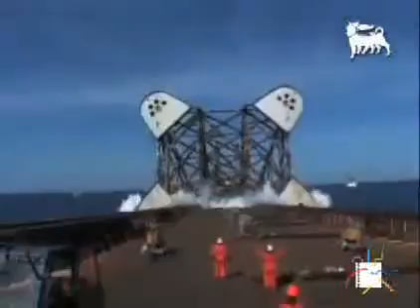A challenge that led to the construction of one of the largest Mediterranean offshore platforms and the establishment of a new world record for offshore lifting, 12,100 tons. For the design of the platform, Saipem put together a task force of about 200 engineers that worked for over a year.

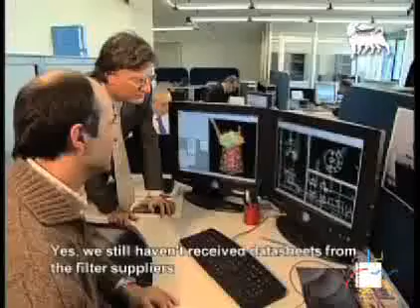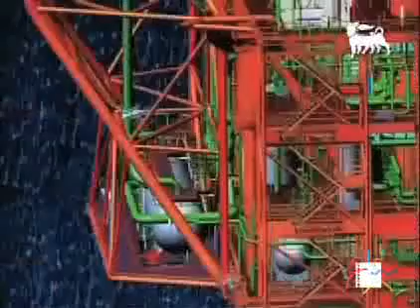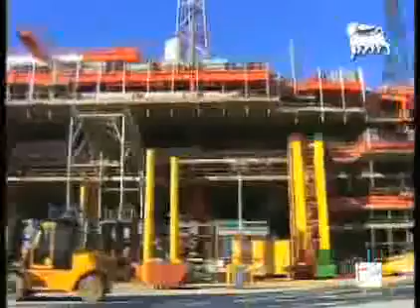The basic design of the Sabratha platform was supplied directly by the customer. Saipem verified the suitability of this basic design and endorsed it. Following that, it developed the detailed design and procured the project materials with the support of the consortium partner Hyundai Heavy Industry, HHI. The construction of the large integrated production deck took place at Ulsan in Korea.

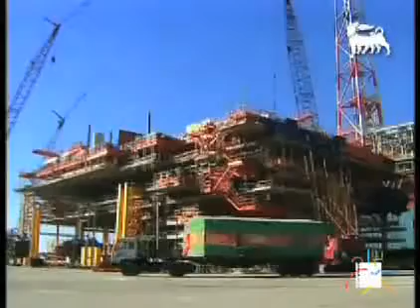The Intermare Sarda yard, fully owned by Saipem on the east coast of Sardinia, has been chosen to build the jacket. This jacket, with its weight of approximately 24,000 tons and length of 207 meters, can be ranked among the biggest offshore substructures ever constructed and installed in the world.

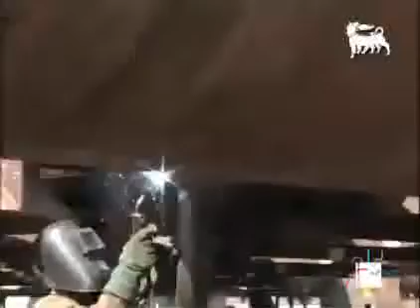In order to accommodate such an exceptional structure, the yard has to be reorganized in terms of both space and project and working manpower. An additional construction challenge was created by the extraordinary thickness of the tubulars, which reached 120 millimeters, and the fact that almost 90% of the nodes had to be thermally treated. By the end of the project, more than 1 million man-hours have been spent in Arbatax alone, whilst an additional 600,000 man-hours were necessary for all the prefabrication work subcontracted outside Arbatax.

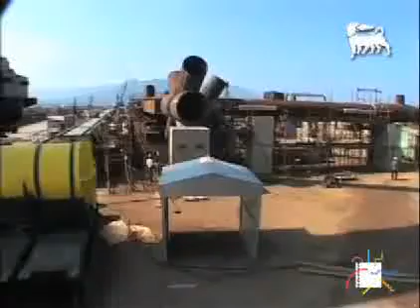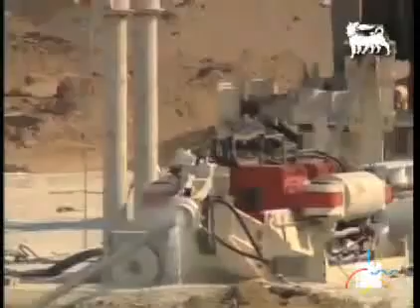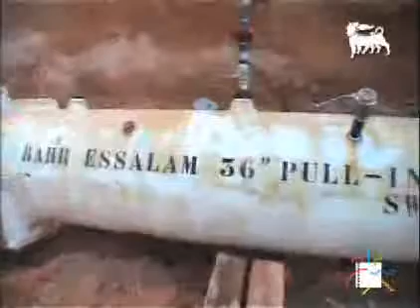Within the ambit of the Bahr Essalam project, two pipelines, 36 and 10 inches, of over 110 kilometers, were laid from the offshore platform to the Mellitah coast in Libya for the transport of gas and condensate. The barge Crawler did the shore approach works. In-field sea lines were also installed to transport the production fluid from two subsea production manifolds to the platform. All these pipes were laid by the Castoro Sei vessel.

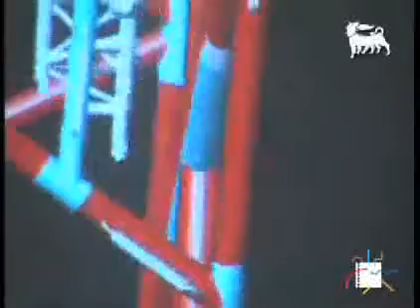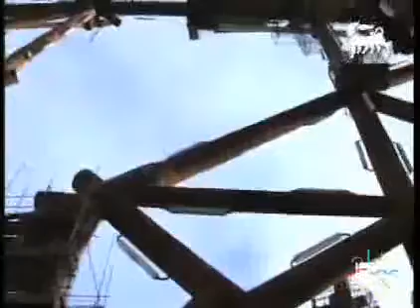Right from the beginning, the jacket fabrication plan was organized in order to split the entire structure into several sub-elements, such as nodes, pile clusters, mud mats, and the buoyancy tanks. All these elements have been prefabricated in various selected and qualified subcontractors' yards and workshops throughout Europe. Saipem and Intermare Sarda made a tremendous organizational and logistical effort in order to ensure that all the sub-elements were delivered on time and with the quality required by the very stringent project specifications.

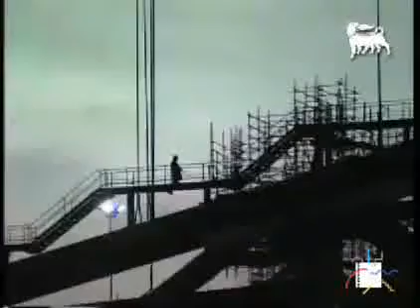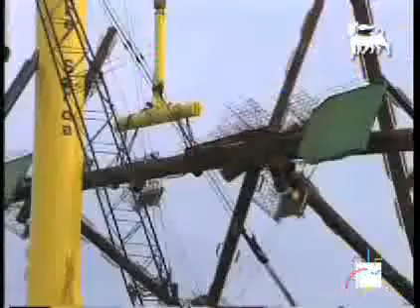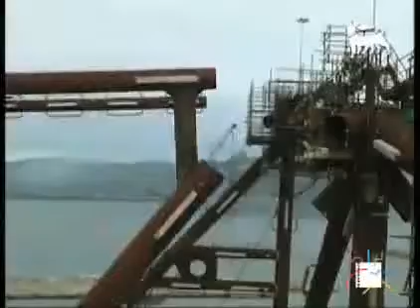All the elements making up the structure were then assembled into 15 major assemblies called work packs, ranging from 1,000 to 2,600 tons. This concept of splitting the whole structure into work packs was made possible by the availability of the 1,000-ton tower crane in Arbatax and of a fleet of self-propelled trailers with capacities ranging from 100 to 600 tons. Furthermore, this method allowed a very high degree of flexibility in the planning of such a massive job and, when necessary, also allowed some margin of delay through very accurate planning control.

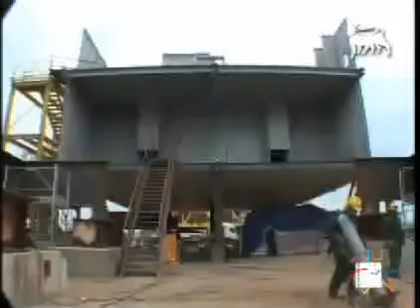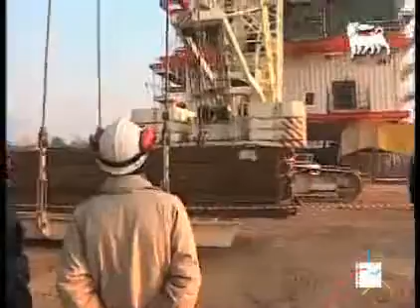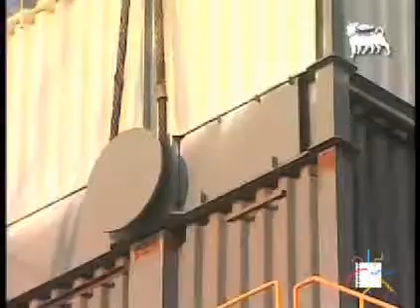At the same time, another company, the Rossetti Marino subcontractor, started constructing the 1,700-ton, 117-bed accommodation module in its yard in Ravenna, together with the prefabrication and assembly of 16 piles for the jacket. The construction of the living quarters was achieved through the on-land construction of every single level and a successive installation for individual floors. The Rossetti Marino yard also paid host to the construction of 2 PSMs, protective structure manifolds.

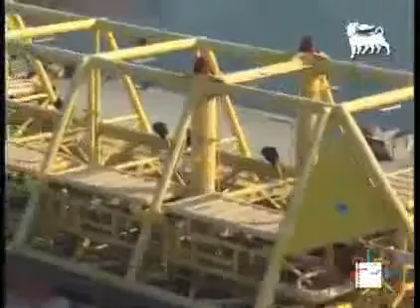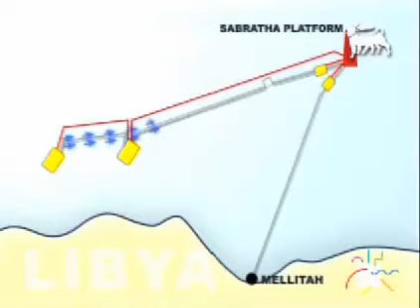The management and organization of the 2 PSM project was the fruit of the cooperation between Cameron Limited, Doris Engineering and Saipem SA. The 2 PSMs are destined for 2 different areas of the Bahr Essalam oil field. The gas and condensate extracted from their subsea wells will be sent through the sea lines to the Sabratha platform and then, after processing, towards the Libyan coast and the Mellitah installation.

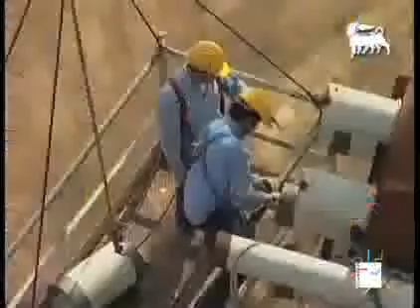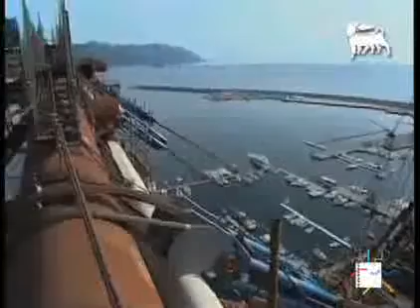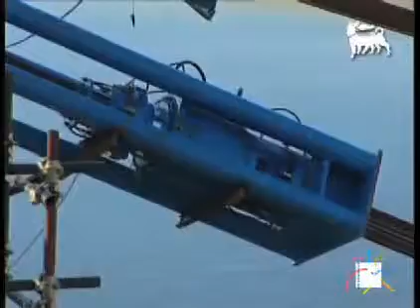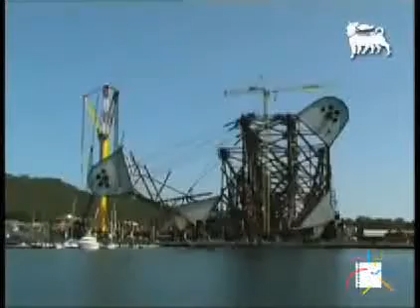The last 6 months of the project in Sardinia were the most critical ones. Almost all the large work packs have been rotated and assembled. 13 of them have been rolled up and erected with the sole use of the yard cranes. But for the last 2 heaviest work packs, incorporating the clusters and the mud mats, and with a total weight of 2,600 tons, an auxiliary lifting capacity was needed, and a very accurate lifting analysis was performed to ensure a safe and clean operation. Special strand jacks were used, fitted to the structures in order to properly balance and counterweight the mass of the lifted elements.

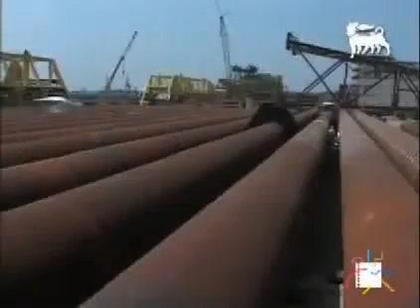In Ravenna, the fabrication of the accommodation module and the 10,000 tons of piles was progressing and reaching its completion stages.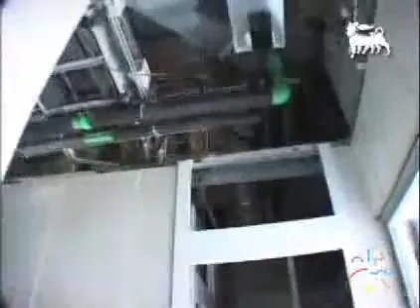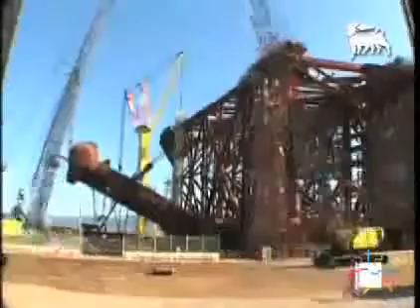One of the peculiarities of this jacket design is the use of 2 large buoyancy tanks weighing 1,100 tons each to allow a self-upending action during the offshore launching operation. The installation of these 2 buoyancy tanks was the final heavy lifting operation in the yard before loadout.

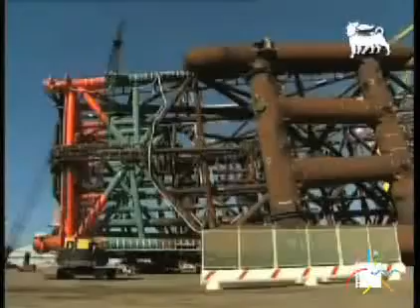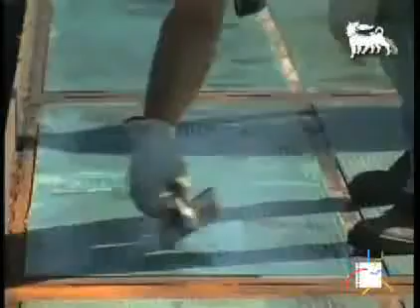The very last critical operation for such a demanding project was the loadout of the jacket structure onto the Saipem 44 launching barge. All the operations were very carefully studied and analyzed in advance, and the result was a very easy and smooth operation. For Intermare Sarda, the whole project required a significant leap forward in method, technology and organization.

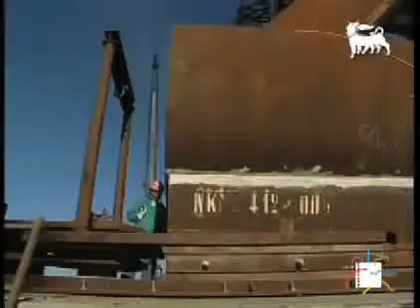Special attention was dedicated to the workers' health and safety in order to maintain and even improve the usually very high standards of yard safety.

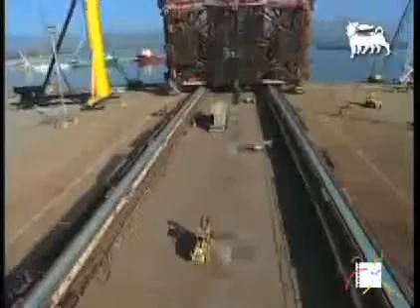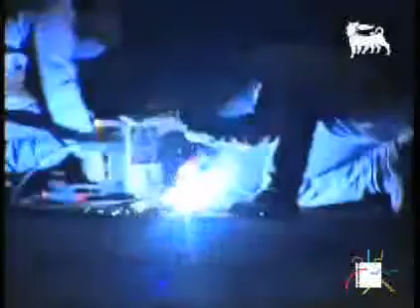Finally, in September 2004, and in accordance with the offshore installation plan, the Sabratha jacket was ready for sail away. The harbour exit operation required an extensive deployment of tugs, together with a detailed planning sequence for all the various steps of barge rotation and towing inside the harbour area.

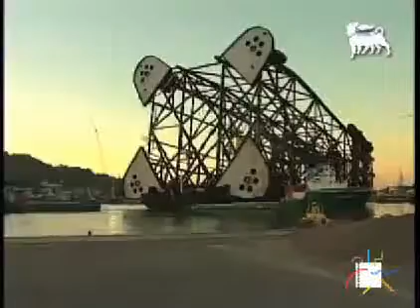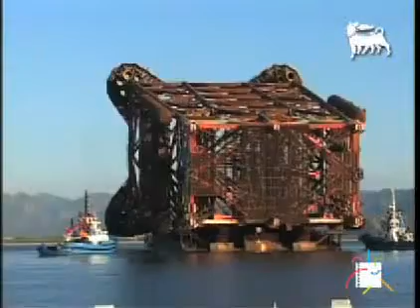Once the barge left the port, the tugs used for manoeuvring inside the harbour were replaced by more powerful ocean-going tugs to tow the jacket to its final destination in Libya. The sail away of the Sabratha jacket was watched by very many people from the towns near the Intermare Sarda yard.

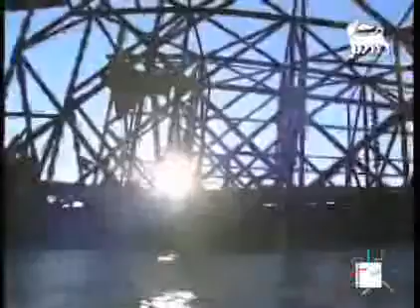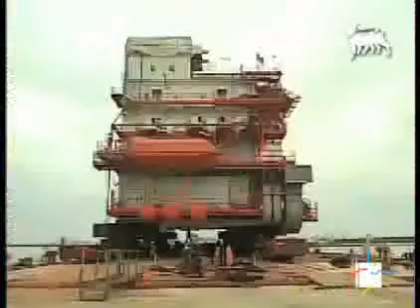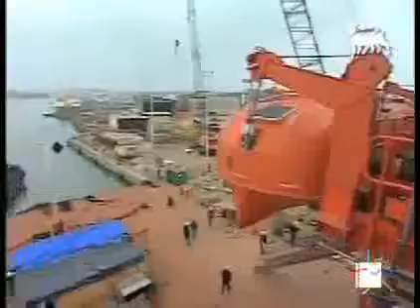In October 2004, the accommodation module was ready for sail away. The living quarters module, consisting of 5 floors and a helideck, is over 25 meters high, weighs 1,700 tons, and was loaded onto the transportation barge using special trailers.

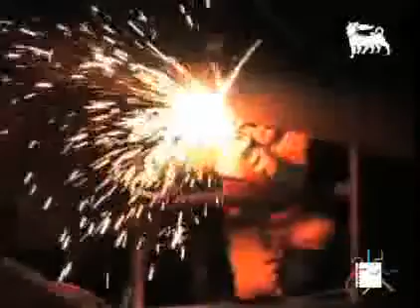At dawn on the 1st of October 2004, the Sabratha jacket is ready for the most emotional operation, its sea launch. Preparation for this operation began the night before with the cutting of the sea fastenings on the S-44 cargo barge. After its inclination up to an angle of 3 degrees by means of a ballasting operation combined with a push-puller action, the jacket takes to the sea.

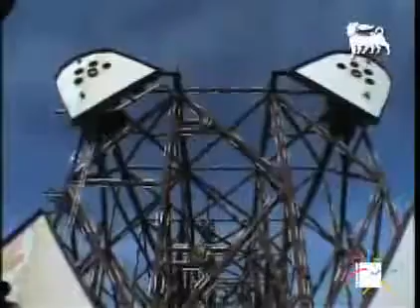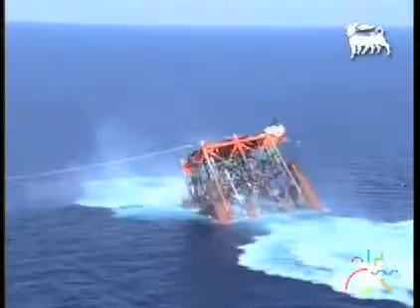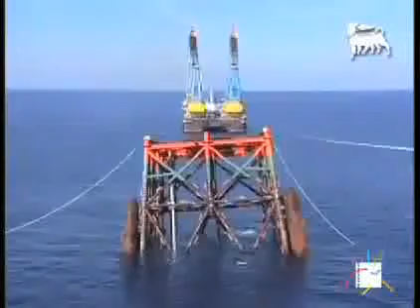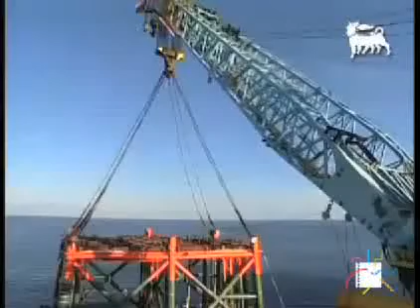The operation is closely followed by all the crew of the Saipem 7000. The Sabratha jacket was designed to be self-uprighting. After the launch, it reaches the vertical on its own. After having connected it to the crane, the Saipem 7000 then transported it to its final installation site to be positioned by means of a docking operation on the previously installed template.

To supplement the Bahr Essalam project, the Saipem 7000 also installed the 2 interception valves. The valves, totally controlled from the platform, are positioned in order to control both the gas flow towards the platform, gathering, and that towards the Mellitah station, export.

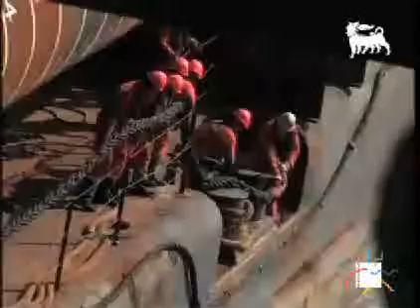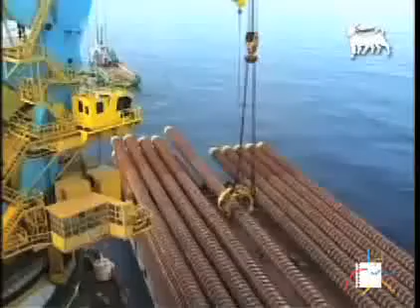The cargo barge Castoro 11 transported the piles from Ravenna. The piles are 147 meters long, with a diameter of 96 inches and a weight of over 600 tons each. Due to their length, they had to be lifted directly from the cargo barge with the help of the Saipem 7000's 2 cranes. The combined action of the 2 cranes, working in tandem, required the use of 2 clamps, one internal and one external, the first at the top, the second at 2/3 of its length.

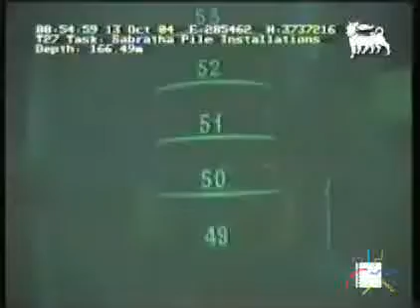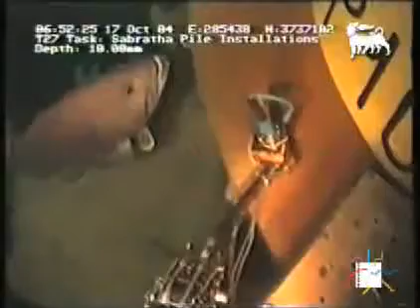When it is fully vertical, the external clamp, the lower one, is detached, while the upper one holds the tube until the Saipem 7000 approaches the jacket. The pile is inserted into the sleeve and allowed to penetrate in a controlled manner under its own weight. With the help of the MHU 3000 hammer, the pile driving phase begins. During this phase, the level of the jacket is constantly kept under control. The installation of the 16 piles required particular attention. The pile grouting ends the fixing phase.

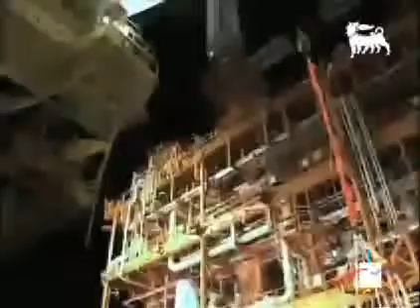Taking advantage of a good weather forecast, on the evening of the 30th of October 2004, the Saipem 7000 achieved another important success. The combined action of the 2 cranes enabled the lifting and installation of the 12,100-ton deck module. With this lift, a new world record for offshore lifting was achieved. The deck module had arrived from Korea with a self-propelled vessel.

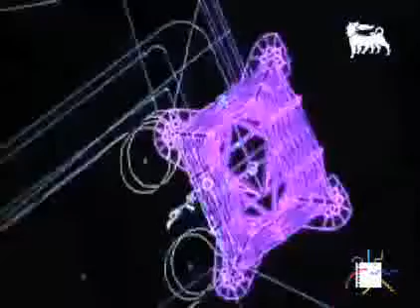It was designed and built with constant attention being paid to the weights. The weight of the production deck was so close to the maximum lifting capacity of the Saipem 7000 that a weight-shedding operation was designed to take place before sail away. In other words, additional small equipment modules were engineered and removed from the integrated deck to avoid excess weight.

A special team was sent onto the jacket to oversee the final phases of deck stabbing. The operation ended at dawn's first light. The Saipem 7000 later installed the small additional modules foreseen by the weight-shedding plan.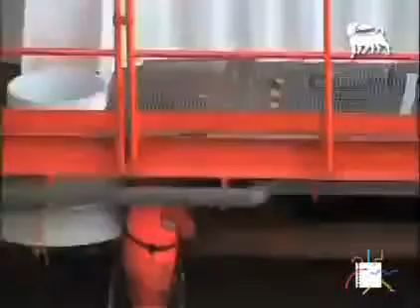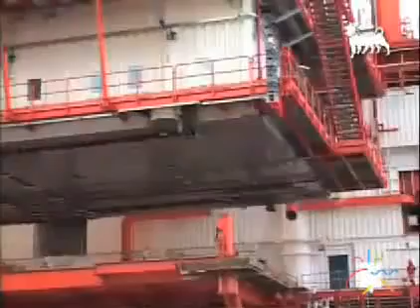Subsequently, the living quarters were installed on the deck. The operation required particular attention regarding the conditions of the sea. The correct positioning of the living quarters took place thanks to the special pin and bucket guides.

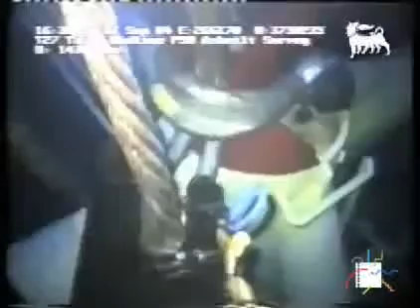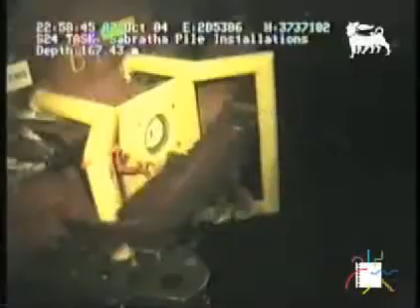The area around the Sabratha platform also generated a great deal of diving activity. In particular, Sonsub made an important contribution, installing 48 spools and 75 flange connectors linking the PSM and the platform. Bar Protector, Polar Prince, Normand Cutter, and many other vessels worked in the Sabratha area.

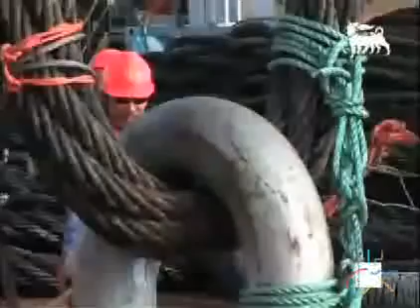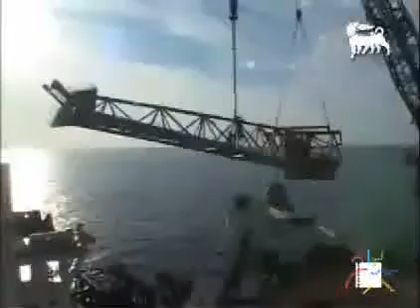The Sabratha platform flare is approximately 150 meters long and weighs about 700 tons. Transported from La Spezia by the cargo barge Castoro 9, and notwithstanding the relatively light weight, it still required the combined use of Saipem 7000's two powerful cranes. The verticalization operation was one of the last exciting phases of the Sabratha platform's installation.

With the platform completely installed, the hookup phase began, followed by the commissioning of the plant. For Saipem, this project is an important result, also in the light of the important records achieved. By no means last was the success achieved when it came to safety, exceeding 1 million continual man-hours of work without a single lost time incident. Saipem is now ready for a new challenge.